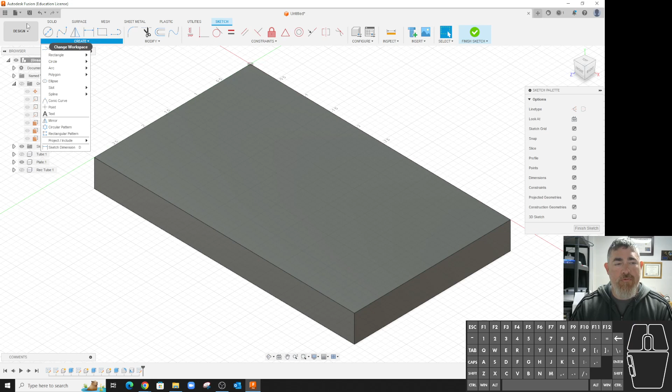So first of all, we're going to start a sketch like usual. When we go into the Create toolbar, you'll see there's a few different options. Yes, we can draw our lines, we can draw rectangles, but if we look down, we can also see slots. A lot of times if we're making attachment plates, we'll want to have a slot so you can have some adjustment. So this would be a good one for that.

One that's good here, the center to center slot. I'll pick a point, kind of drag it out, click, and then just drag it out and click. And it puts it in.

Now I can dimension what I want. If I just dimension this arc, you can see it's going to give me the radius by default. If I right click, you can tell it, no, I want the diameter. Now that's also going to give me the distance across it. Or I could just dimension, pick those two lines, and now I have that diameter also. So either way works.

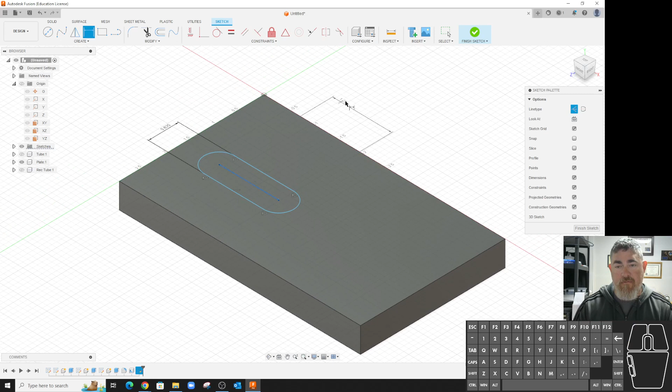Maybe I'll make that 5/8, and I can dimension how far it is between centers. I tell it 1, but this thing can still move around. And so if I want it to be offset, that's fine.

I can just pull it over somewhere and then dimension it either from the center or from the side. Usually it's from the center. Maybe tell it from the center of that arc to that edge, I want that to be 1 inch also. So I could do all of that.

If I wanted to line it up though, I could just draw a line from the midpoint, kind of trace it over until you get to the triangle and go there, and now I can tell that to be lined up. So now it's centered on the part, and so now I can dimension just how far I want it to be from that edge, and it's done.

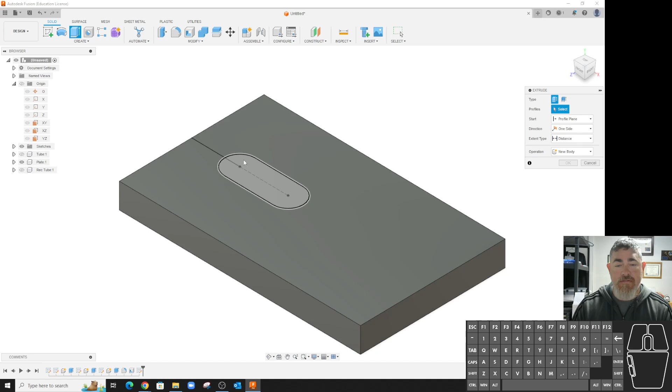So if I go ahead and finish and extrude this, tell it to go all the way through and flip the direction so it cuts. There it is. Now if I go back and I edit that first sketch, I change this width to be wider, that slot still stays in the middle of the part.

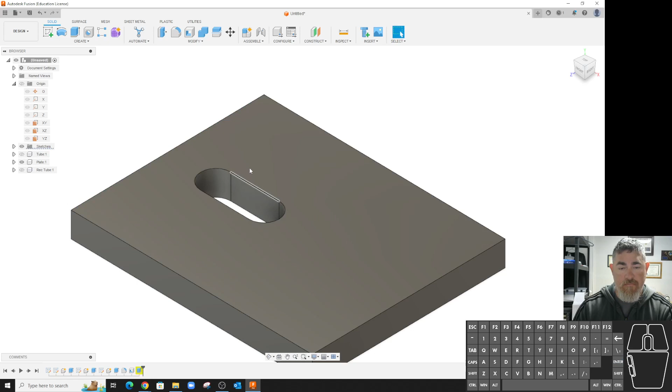Take it out. If I look at it, there's also an option for an overall slot. And that could be horizontal. Now you can see the line goes the entire length.

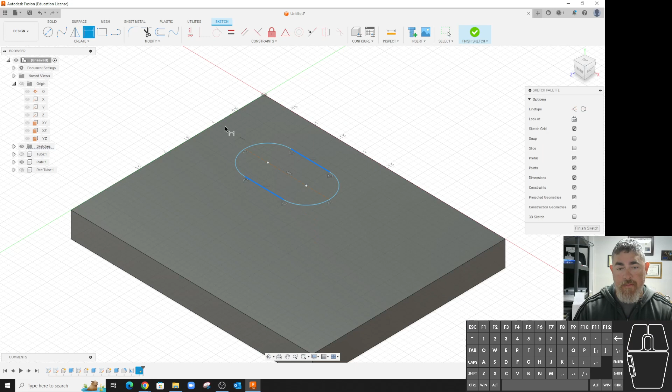So now I can tell it that I want the width to be 1/2, but I want that overall dimension to be 1. So now instead of changing the center to center distance, I'm changing the overall length. And depending on how you're drawing it, what you want, you might want to do that. It would center it up the same way as the other one.

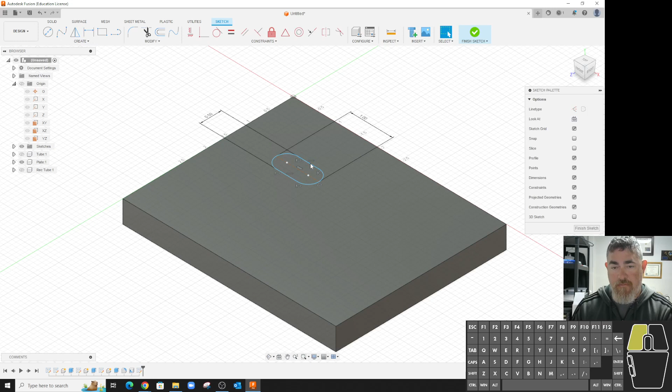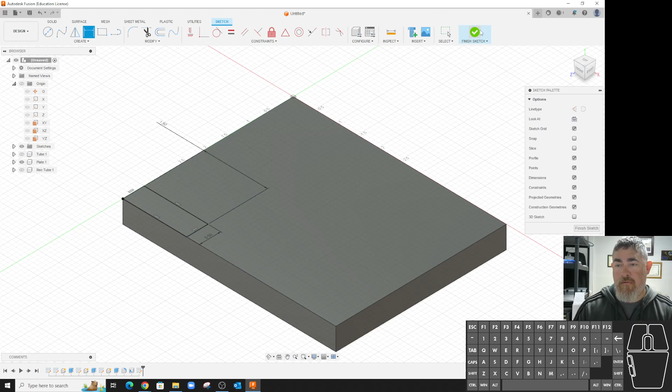If I wanted a different, like a cutout on the corner or something, now I can just draw that in with the rectangle and then give it my dimensions. And then extrude it over there and cut out that piece to make whatever I want.

And so it could be something like this. It could be, if I wanted to have a cutout that's a circular cutout, I could draw a circle here. Tell it that I want it to be 1.5 inch diameter, and maybe I want the center to be 1/4 inch outside the part, and the center to be 1.5 inch from the edge. So I could do that.

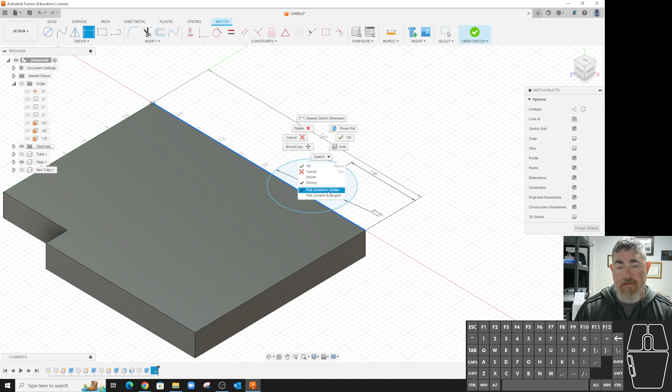I could also, instead of putting this dimension, I could dimension, pick this line, and then right click and tell it tangent, and pick the bottom corner here. So now I know how much it's cutting into the part.

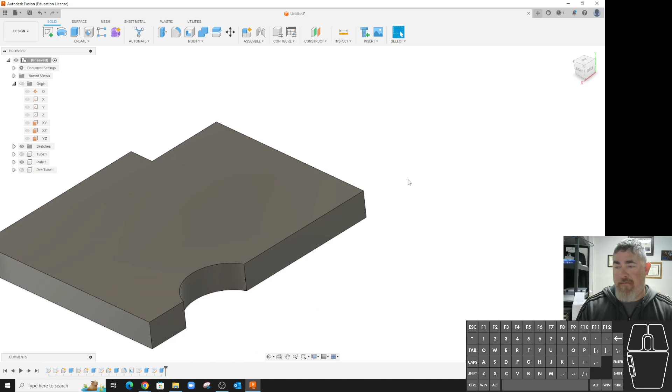And then I'd finish and then go to extrude. And because there's two kind of separate profiles, I can pick the one that I want to use. And again, tell it to cut it, and there we go. So I have that cutout that's there.

If I'm on another piece of material like this, now if I want to go all the way through the edge, I'd do it.

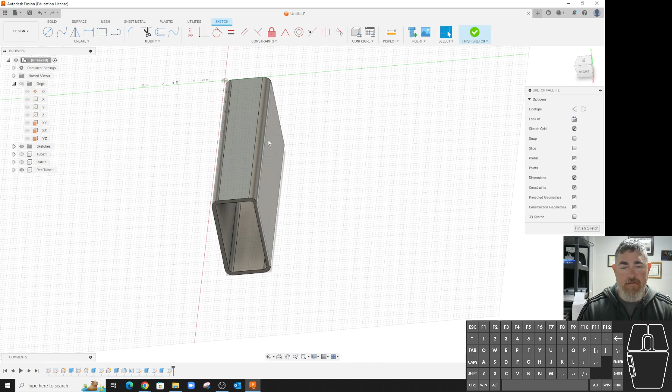So if I want to cut here and cut through, I'm going to create a sketch there. But remember, this edge here where the side of the part is, that's not shaded because it's below the sketch plane. You can see it's curving down. So if I want that edge, in order to reference that, I need to project it. I'm just going to pick on that, press P for project instead of going through the menus this time, and say OK. You can see it brings that projected edge up that I can work off of.

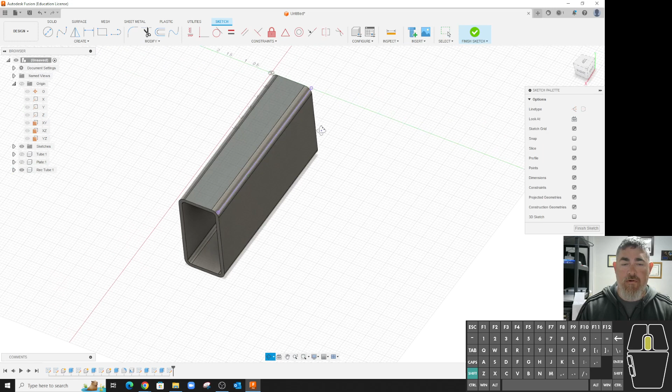So now let's say I want to have the circle centered on that edge. I can do a circle, pick that there, and then give it a dimension of 1.5. I can tell it I wanted it to be 2 inches from the edge.

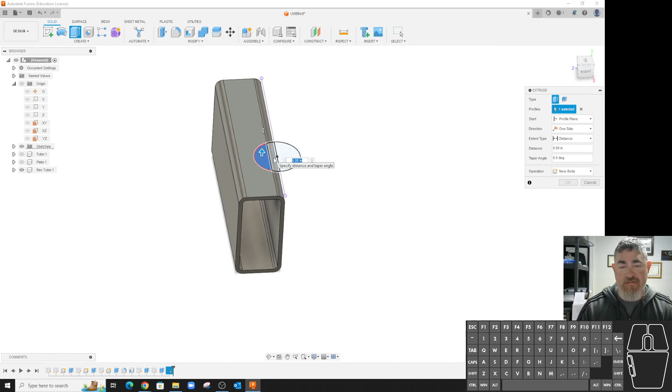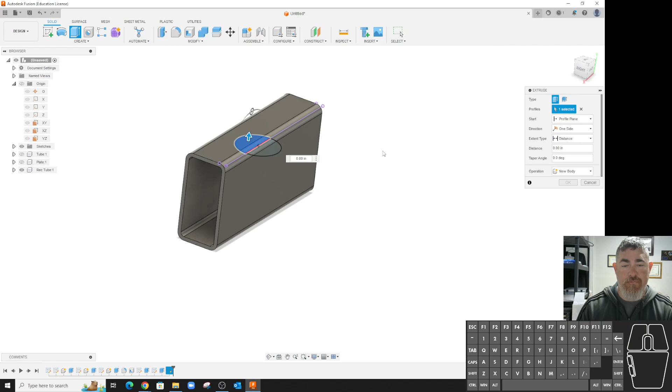So now I extrude that down. Oh, look, it's got multiple sections, so I need to make sure I pick correctly. If I just pick that, I'm going to get there, so I want to make sure I pick that also, so it cuts all the way out. Another way to fix that is, while I'm here, if I take this line and delete it right there, now you can see it's highlighting that whole area. So now when I go to extrude, I can just pick that and cut that out there.

This can also be used if I have a hole, if I want to line up a slot with a hole. So if I create a sketch here, I've got 2 little lines there.

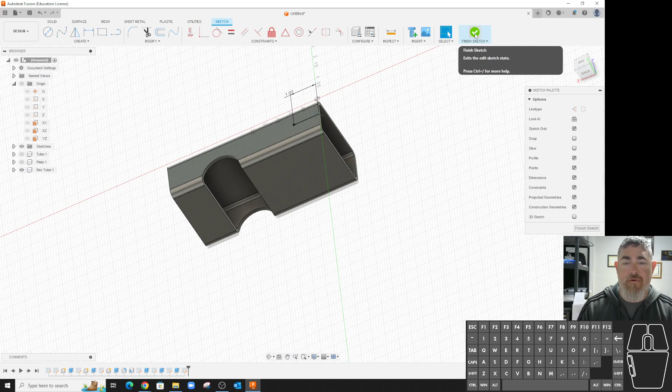So anytime you have a white dot, that means it's not fully constrained, so stuff can move. You always want to make sure we don't have any white dots left. Now I can put in a hole there on the top. Let's say I'm going to make this a clearance hole for 1/4, just a simple hole.

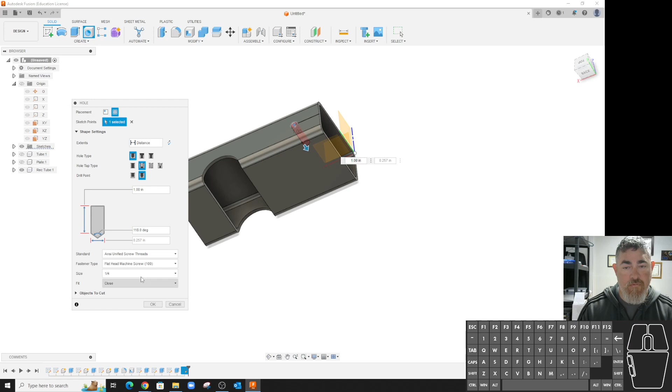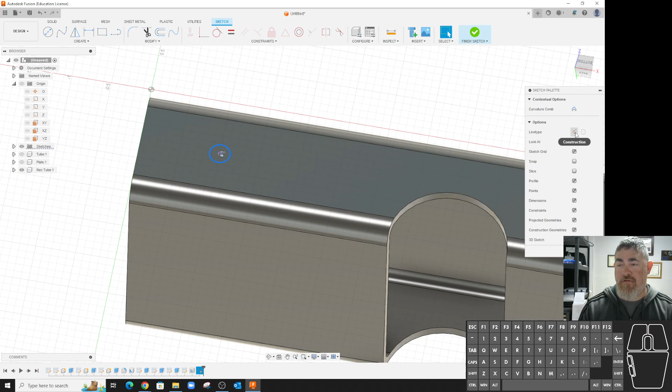I'm just going to have it go through there, but on the bottom I want to have a slot that's lined up with that. So I can create a sketch here on the bottom, and then again project that hole and say OK. I don't want it to use this hole as part of the shape I'm going to make, so I'm going to pick on it and tell it to be construction. Over here I can tell it construction, see, it turns dashed, and now I can do a slot.

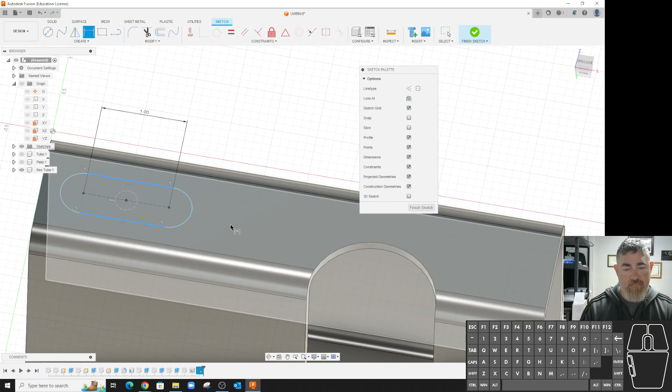This time I'm going to do a center point slot. I'm going to start it on that one, bring it out to the side, and you can see it goes out each way. Now I can tell it that I want that to be a 1 inch long slot, 0.5 wide, and I can just extrude that down. I can say 2, just pick that bottom of that, so it's only going to go there. So now I've got that slot that's lined up perfectly with the hole.

So I can do those kinds of things by just sketching the shape that I want to cut and cutting it out.

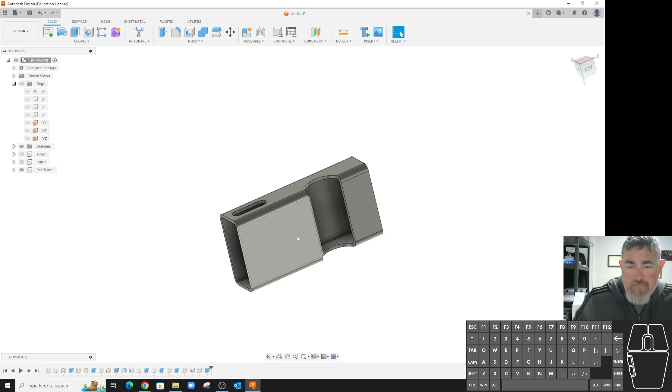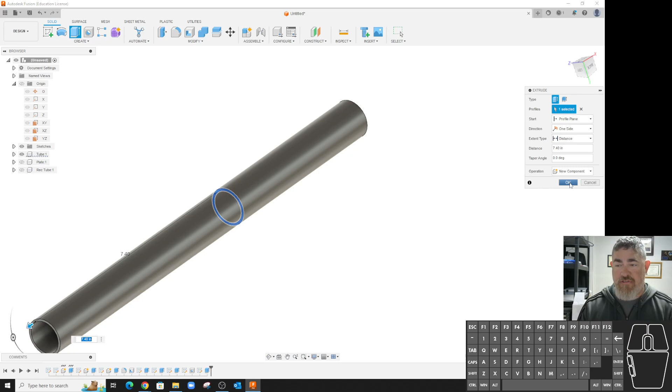So as I'm doing things, I want to start putting stuff together eventually. Let's say I've got this piece of tubing, and I want to make another piece of tubing exactly like it. Remember, I can always just extrude, pick on the end of it, tell it to be a new component, and pull out another piece that's going to have the exact same shape as that one.

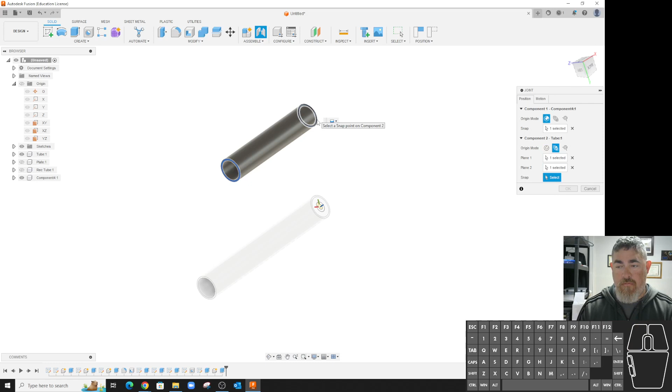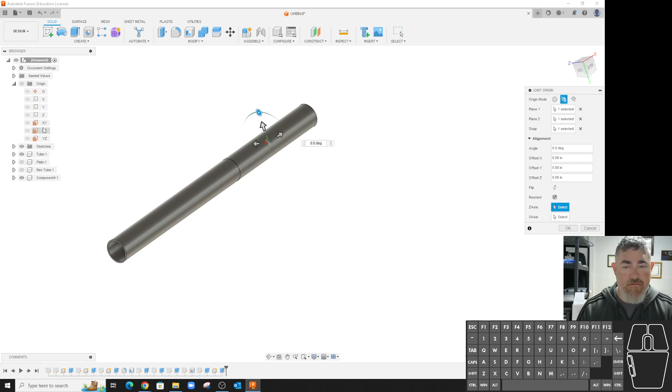So let's say I want to put these together. I'm going to take this and joint them from there. What I want to do is flip it. So let me create a joint origin real quick. I'm going to reorientate that so it's going that way.

So now when I put this on, it's going to flip it up. So right now those are crossed over, and I don't want that to be. I want this one to be cut out to go around this piece of tubing there.

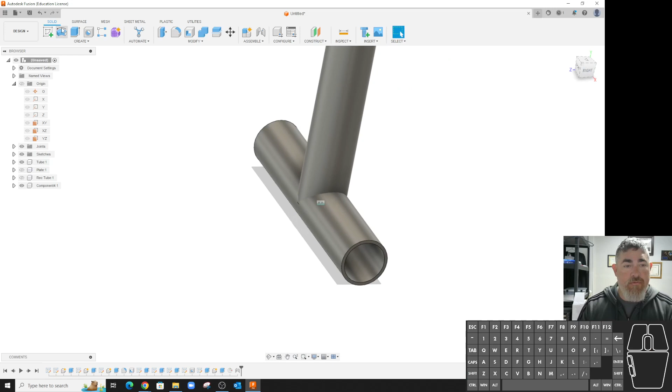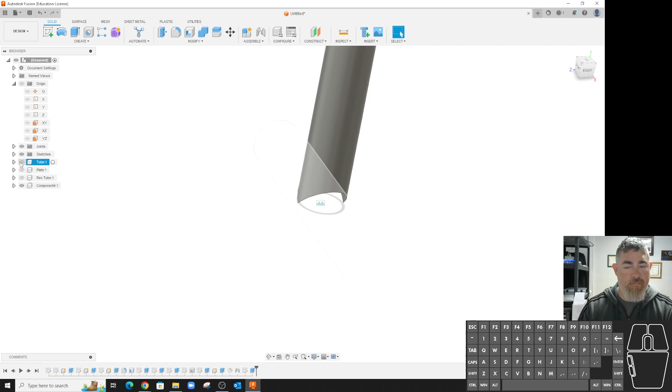So an easy thing to do, I can just create a sketch on that end here, delete that inside shape, finish it, and then I'm going to turn this one off. So this one is this tube, I'm going to turn that off. Now I can just extrude and go like that, it's going to cut it off. Now when I turn this one back on, it's got a perfect cope right there with the cutout of that shape that went through it.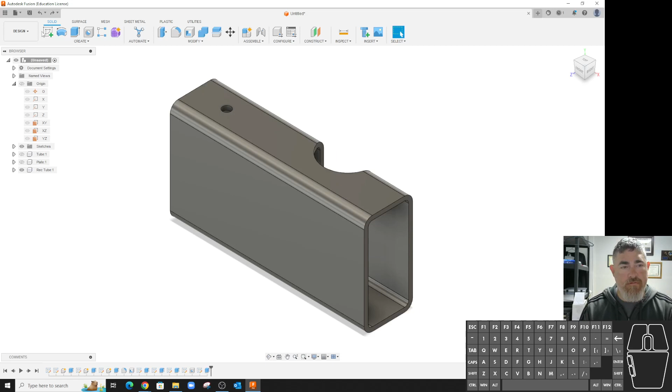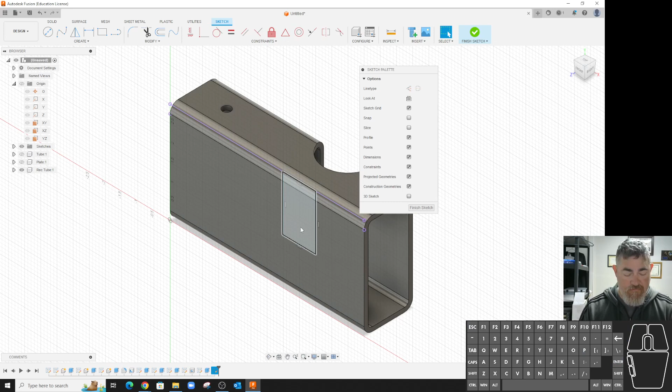You could also do that if I had this piece of tubing here and I want a piece of material that kind of goes around it. So let's say I'm going to have a piece of square tubing, it's lined up with this, so I can create a sketch here, and I'm going to draw it here, and I want to make this edge and that point coincident, or project that edge and make that corner on there, delete that edge, and make those two equal to each other. And I'm going to tell it I want it to line up 1.5 inches from that edge. So I want to extrude this out.

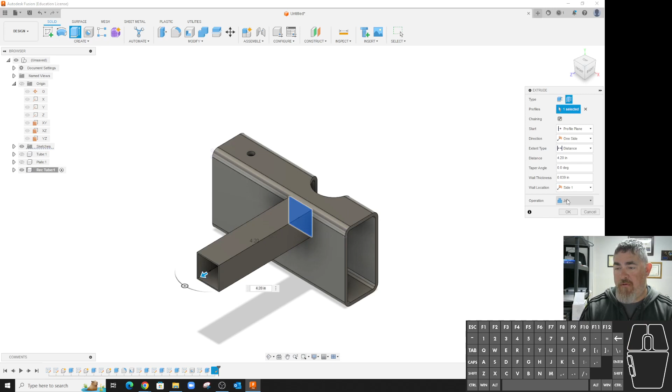So I want to make this aluminum tubing so it's hollow. I'm going to tell it to be a new component so it doesn't join it. It's there, and so I've got that gap there. If I want to fill that gap...

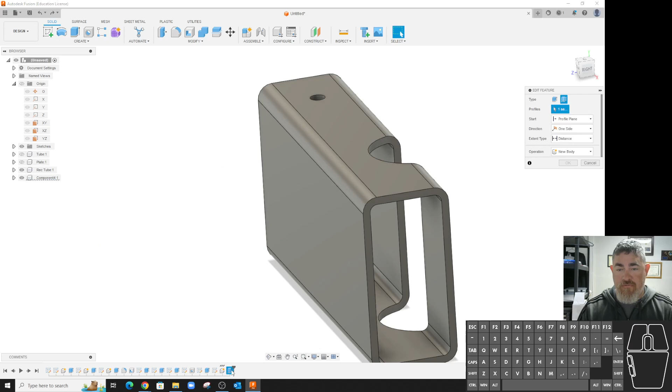A couple of things I can do. One is I can move it inside and cut it off. So instead of doing it that way, I can make this extrude two-sided instead of just one side. Now from this other side, I can just tell it to come to that corner. I just pick on that corner and it goes there. You can see it's offset in there.

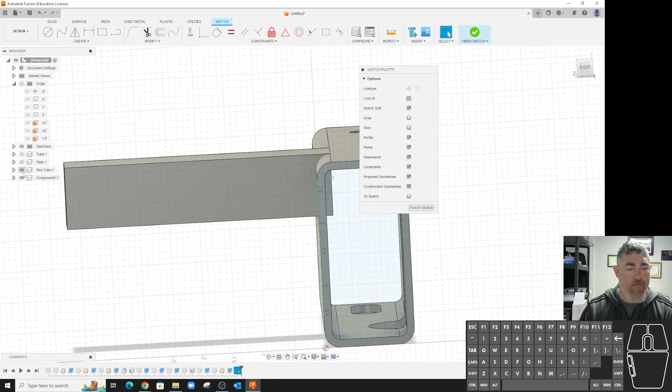So I need to do the same thing I did before. I'm going to go ahead and create a sketch here on the end of this rectangle tubing. Delete that inside edge so I just have that outer edge. Turn off the rectangle tube, and then extrude that all so it cuts there.

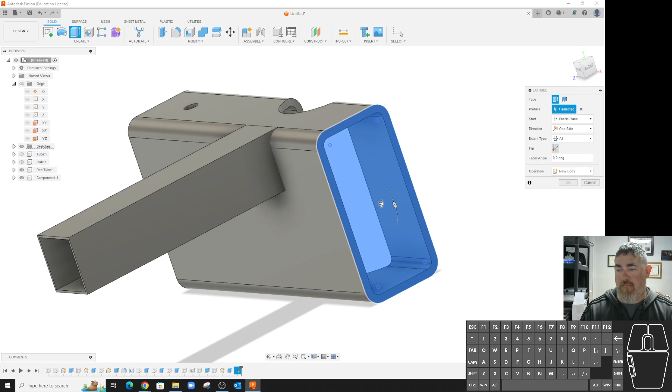We want to turn off the other one because we want it to cut the things that are visible. If we have that other one turned on - if I still have that rectangle tube turned on and start that extrude - see it's going to cut out the tube. But I can also come back in, down under objects to cut, and tell it not to cut the tube, just uncheck that rectangle tube, and that way it doesn't cut it.

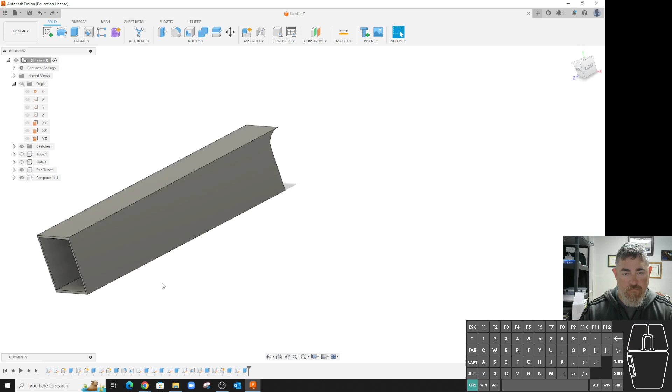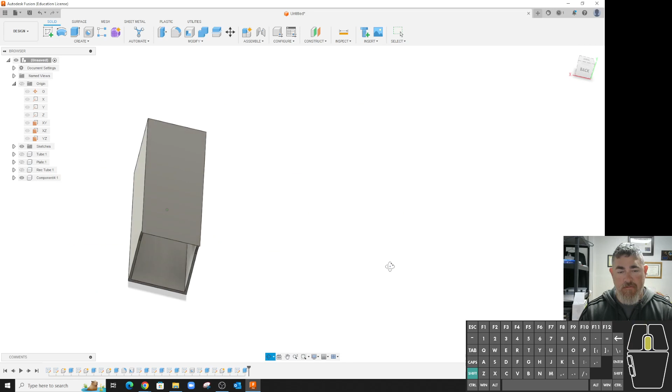So, not to cut the rectangle tube there. I don't know why it didn't work that last time. And say OK, and it will cut just this piece and not that piece. So if I turn it off, you can see that one's cut and has the cope on it. So it's fine there.

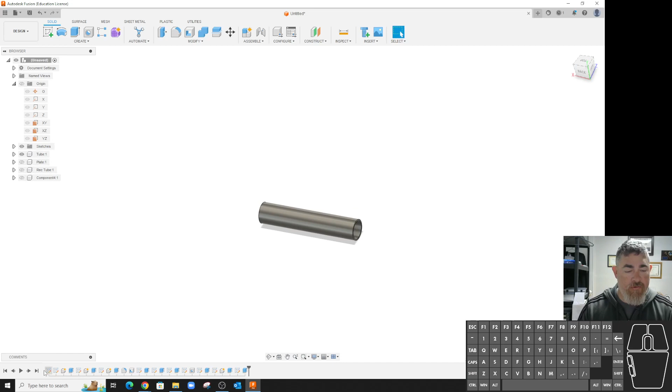Another thing we'll want to do sometimes is we've got a piece of round tubing, and we want to cut this at a 45 so we can put it together and create a miter there. So when we draw round tubing, we always want to try and draw it centered on the origin so that we have planes going through the middle of it. It makes it a lot easier to work with.

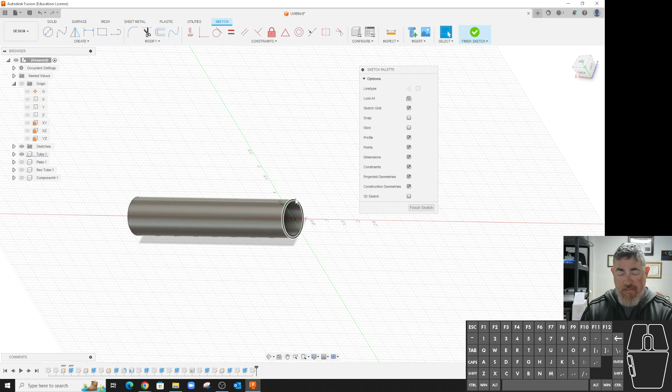So now I can just create a sketch. I'm going to pick this plane that's going right down the middle. And now I can just grab this edge here and project it. I can draw a line from the top corner over and back down to the bottom corner. And I can just dimension from there to there and pick my angle. So if I want it to be a 90-degree corner, I can make that a 45. If I want to make it a 45-degree corner, I can make it a 22.5, and so on.

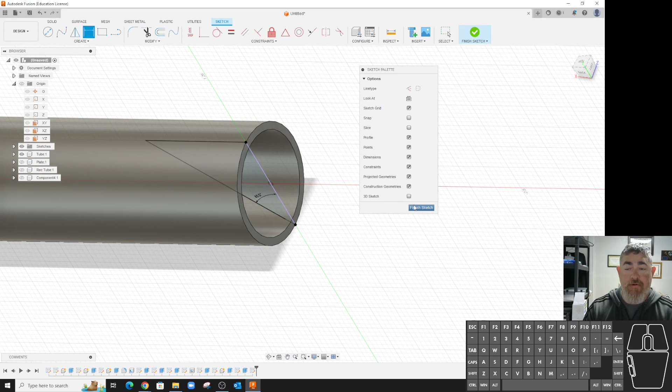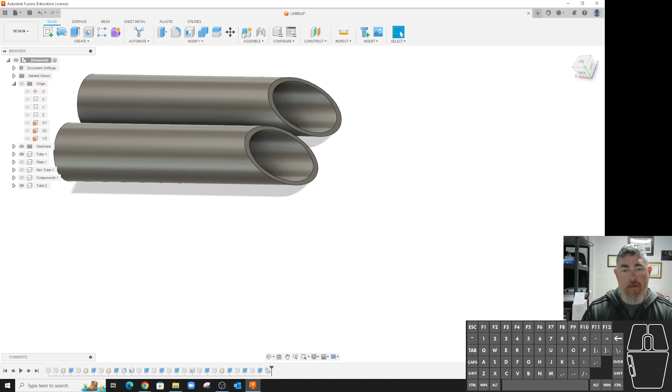So I'm going to extrude. Now I'm going to tell it to be symmetric. I'm going to bring it out and have it cut all the way through, and I can just say through all, whatever I want. So now if I copy this and add a joint, you can see it changes that. So now it's a 90.